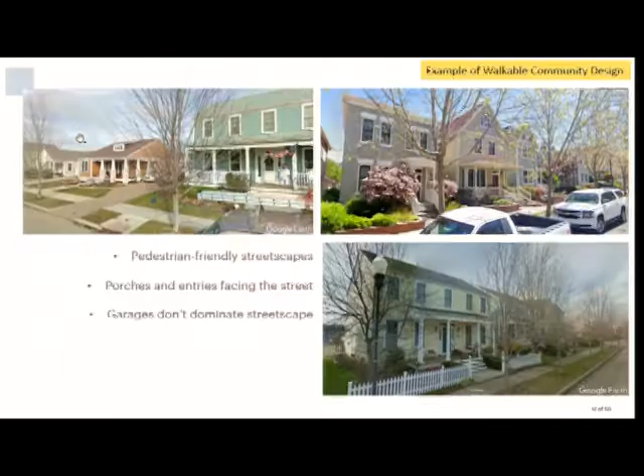So we talked about the input we've received so far, but what is this code about? What is it making? Here are examples of what this code is aiming to make. We are not regulating architectural style, but we're regulating form and relationship of the buildings to the street, the height of buildings, all that.

One thing, if you take one thing away from tonight, hopefully it's at least this: all of these buildings are house scale buildings. Remember that term. There's basically 2 categories of buildings. House scale buildings are the size of houses, large and small. Those might be a single house, a 4-plex, or a duplex, but they're house scale.

The other end of the spectrum is what we call block scale buildings, which are always bigger than a house. They might have multiple units, they might be commercial, office, or a hotel. But as soon as you get bigger than a house, it's a block scale building. This entire plan, this entire code, is all about house scale buildings. That's a really important thing to understand and know.

So the big takeaway is that all the streetscapes are pedestrian friendly. One of the things we mean by that is there are porches and entries facing the street, and the setbacks are not huge. Although we have a utility easement along the front of all lots that requires a 10-foot minimum setback no matter what, plus whatever you add to it. You see that the garages aren't all over the front, and some builders still want to build that, and that's great because some buyers still want that. But more and more, people want neighborhoods that aren't dominated by garages on the streetscape.

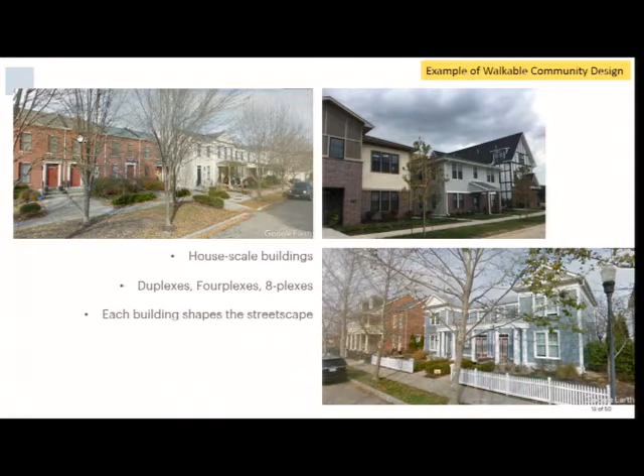Have you heard of that? A cottage court is like a lot, maybe 100 feet wide, with maybe 6 or 7 individual cottages arranged around a garden—pocket neighborhood is another thing people call them. So that's in here. But you can see they're still all house scale. They're not 3-story buildings, they're all 2-story buildings.

And then there's a small area that would be zoned at Main Street. I like to say—I know these pictures aren't of Dubuque, but I always use the example of Dubuque Street here in downtown, that 1-block stretch from the Vetro north, off of that pedestrian mall. That little 2-story block stretch has a small town Main Street feel. That's what we're proposing for a 1-block area, basically at McAllister and Sycamore, and that would be for this whole South District. So it would have its own little main street—it just wouldn't compete with downtown, obviously.

And this is not new. This is a development in Papillion, Nebraska that we're working on. The developer there, his name is Jerry Reimer, and the project is called Prairie Queen. There's 40 acres - I thought it was 60, I said earlier, but it's 40 acres, 600 units.

What he did is he came to us and said, I'm a multifamily apartment developer, and I'm done. I don't want to do it anymore. I'm sick of it. I don't want to do single-family development, but I don't want to do multifamily development as I know it, and I've seen this thing missing middle. What about it? So he signed us up to design this neighborhood. There's not a house in it.

It's duplexes, fourplexes, sixplexes, eightplexes, and then townhouses. And then there's a little main street on the top left, and there's neighborhoods around it to the north and west. He strategically put that little main street basically in the center of a bigger place. So it's off to the left of his project, but it's actually in the center of a bigger place when you zoom out. I show this to you because he's building 600 units here.

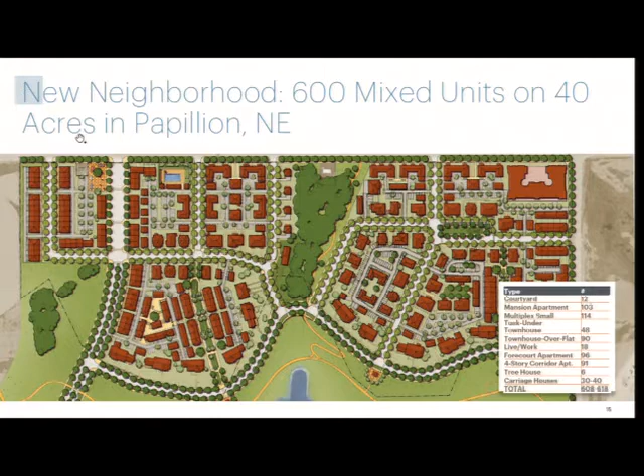An important thing to point out is that the efficiency that single-family house builders count on is similar in these missing middle types. This slide shows there are about 6 building types, different options out there, and we developed 6 unit types and basically arrange them in different configurations to make those different building options. So the builder knows, oh, I have a palette of unit types, and I can use A and E to make a duplex, or A, B, and C to make a triplex, and so on. But you don't have to reinvent them. So you've got 6 unit types designed, and he just mixes and matches them to create 4plexes, 6plexes, whatever it is, and makes different buildings.

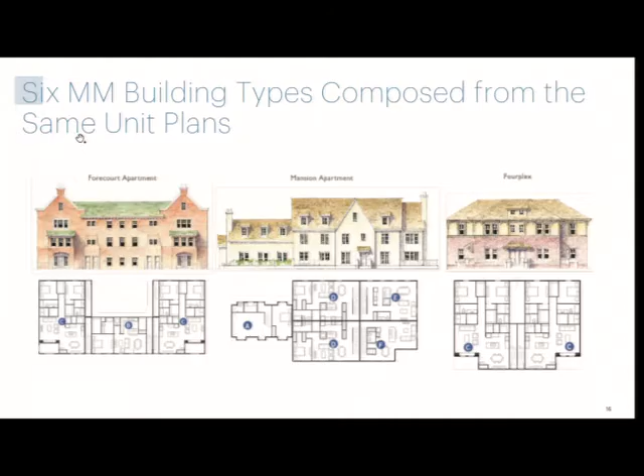But you can see how they're house scale buildings. They have the 2 stories, and the 3rd story is in the attic. The features that this type of approach basically has are these that I'm going to point out here.

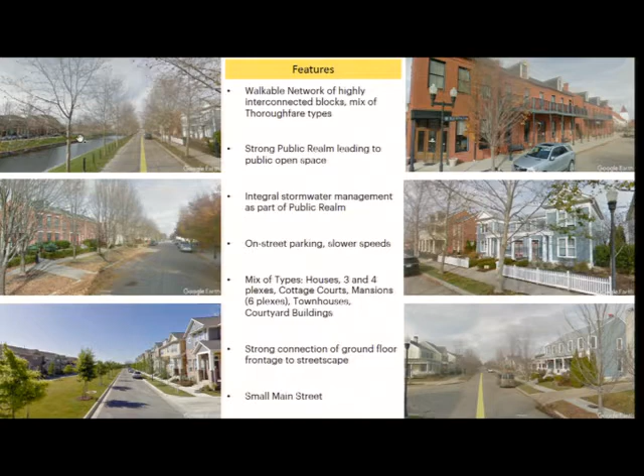It's a walkable network of highly interconnected blocks, and walkable means that there's somewhere you can walk to within walking distance. You might say, well, I can walk everywhere, but there might not be something you can walk to, and so that might be a center. It might be like a neighborhood corner with a cafe at it, or the main street, or a little park. There's always something you can walk to, or maybe it's nature here at the edge of the South District.

There's a mix of street types - we call them thoroughfare types - and that's to make... if you look at really interesting places, they're not all the same thing. The public realm is very strong. The public realm meaning the streetscapes outside - when you go outside of a building, you're in the public realm. That's always in these kind of projects designed very well, very nicely, and it connects it all. It's like a big fabric or a big network to connect it all.

Then stormwater management - it's always integral as a feature instead of being put off to the side with a fence around it. When you do this, people say, well, we have to collect stormwater and manage it. Why don't we just make it into a system that is right along the streets or into parks, and we can actually see it, and the buildings confront it, and it's a feature. Even when it's filled with water, you can look at something.

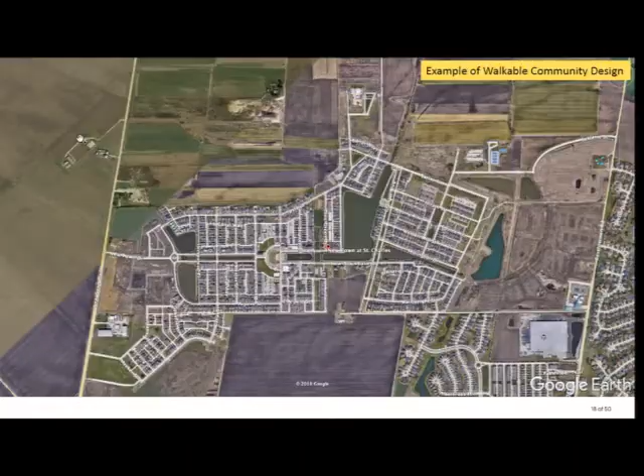So let's talk about the code. This form-based code, we're writing it for the South District, but we talked to the city about writing it so that if you wanted to someday apply this to other greenfield areas not yet considered, you could use this tool beyond the South District—so you wouldn't just silo it to those 1,700 acres. So when you read this, it doesn't say 'the South District code,' and that's why—so that you could take this and, through a process, map these zones onto yet-to-be-determined areas in the future. So you get more bang for the buck.

So how many of you have heard of the transect? Okay, a couple of you.

The transect is basically a really simple system somebody came up with about 20 years ago. They said, hey, we need a simpler way to talk about development than we currently have. So this system basically says, when you break it all down, talk over and over and look at everything and boil it down, there's basically 6 categories, or transects. Each is a category, and the first one is nature.

T1 is nature, and you have that here at the edge of the South District. T2 is the country, rural. T3 is basically neighborhoods that are mostly single-family houses but have something within walking distance to go to—so it's not suburbia. A lot of suburbia isn't T3. T3 is most like your north side neighborhoods, the single-family portions where you have something to walk to, those older neighborhoods. A lot of that is T3.

T4 is the opposite—it's also some of your north side. It's some single-family houses, but mostly fourplexes, duplexes, and sixplexes, buildings like that—house-scale buildings. We're still all talking house scale, okay? T5 is like a majority of your downtown—big footprint buildings, whether a couple stories tall or many, usually up to about 5 or 6. T6 is like the building across the street with the big hotel, the Hyatt Place, or those other big 10, 12-story buildings.

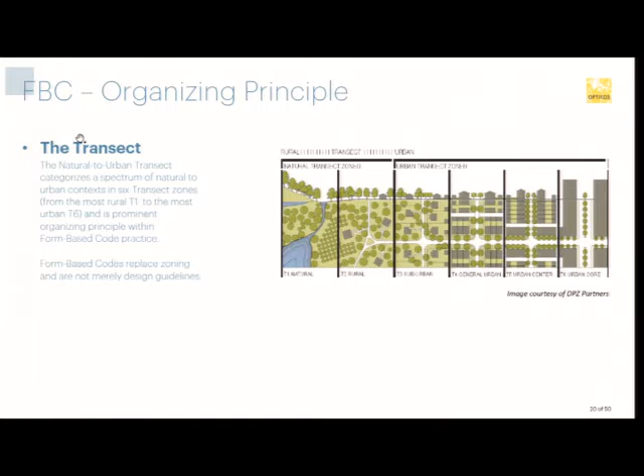So let's apply that to Iowa City. In the left-hand corner, T1—that's nature, right? It doesn't mean the development that left a little park in the middle; it means nature, green areas, wetlands, all that. In the South District, it's at the edge, and you totally have it. Then T2 is farms and country.

Not low-density residential, but farms and country—very different. T3, again, we talked about that, and those are examples here in town. Then you see T4. Now look at T5 and T6—you see how much bigger they are than T4 and T3? You can just visually see that, right?

Well, in the South District, we're only talking about these—nature, T3, and T4. We are not talking about the others.

I think one of the owners slash developers asked today about essentially a building that would be in the T5 category. And we said that has never been in the cards, as far as we understand the vision for the South District. Now, if that has changed, that's something from a policy level that we need to hear, because this code doesn't accommodate that—this plan does not accommodate that.

Just want to be super clear, that's what we're talking about, these three. When you break it down into those, it's really simple to understand - Nature, T3, and T4, and we can talk that way. It's a lot simpler than urban medium or residential high. Believe me, we've tried all that, and it's just very hard to communicate with each other about that - is it RS-8, RS-12? Which one's more intense? It's way easier with T3, T4, and T1.

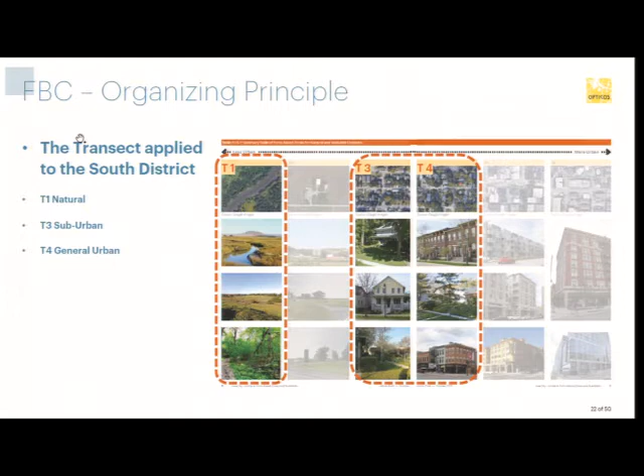So very quickly, those zones with a little more detail. Here's the nature zone - it's no development. If there's a utility building or some type of safety building that needs to happen out there, obviously, but there's no development per se. It's nature.

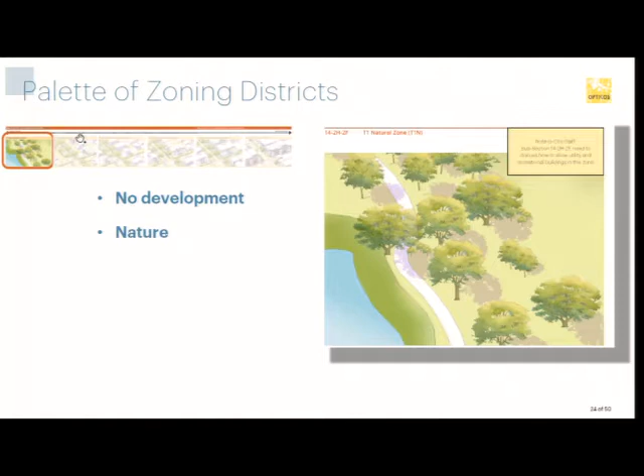We broke T3 down into 2 flavors. One is the edge, and you see it's 2 stories. Instead of using density and floor area ratio in this code, it uses building types. So it's like saying, here's a duplex, here's a fourplex - are either of these allowed in the zone? Yes or no? That's how this code works. It identifies all the elements, all the types, and it tells you if they're allowed in the zone or not. In this zone, house, duplex, and the cottage court are allowed.

In the next flavor of T3, there are a couple more options allowed at the bottom. You see multiplex small, that's a 6-plex, and the townhouse small.

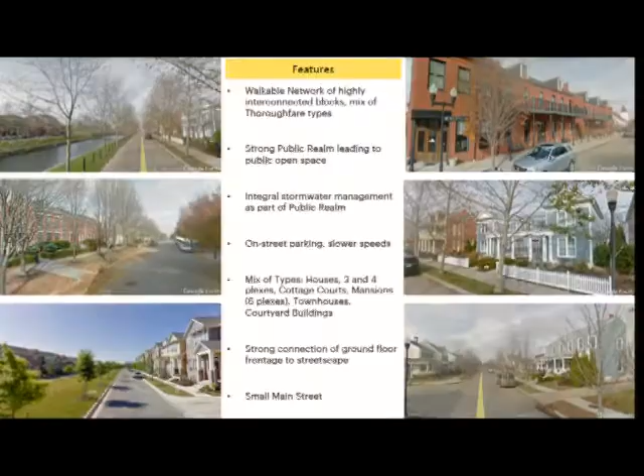I got to show you this 6-plex to show you something here before I forget. You see the building, middle right, the blue and white building? What do you think that is? Anybody? What do you think that building is? Multiplex small - what's that? It's a 6-plex, but it's a multiplex small. Exactly.

The story behind this is that I was talking to the town architect last year, and he said he loves showing that building because somebody came to him to buy a lot to build a house in Newtown, St. Charles, and they said, take us around and show us what we can buy, what you can design, because they design every building fresh there. You come, and if it's a single-family lot, they say here are the rules, but you tell us what colors you want. So they were walking around, and as they walked out of his office and down the street near this, he was showing them other buildings over to the left, and they said, whoa, stop - design it like that. And he said, that's a 6-plex at 36 units to the acre. And they said, no way.

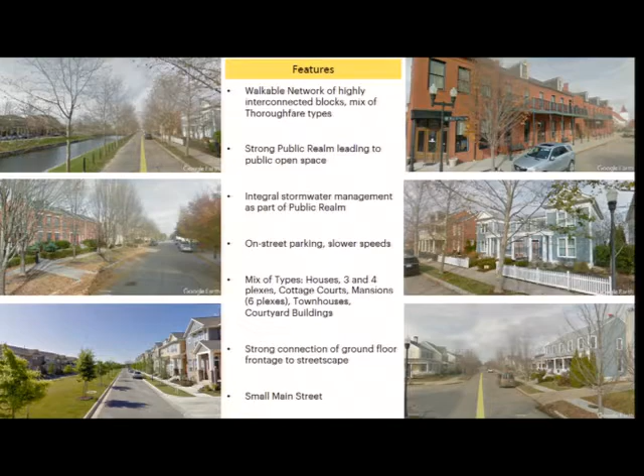I said, well, design our house to look like that. So I just wanted to show you that this thing, density and all this other stuff that we've been given as rules across the country, they don't really serve us in communicating with each other. They looked at that and said, wow, design it as a house, and we can't even believe that that's a 6-plex. It feels so good, house scale. So just a little story there.

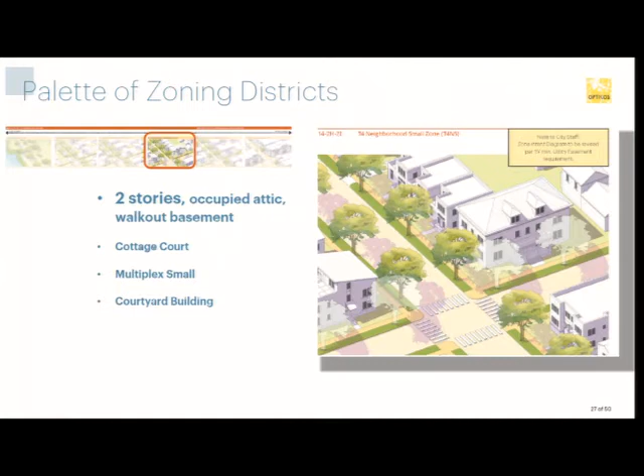So those are the 2 flavors of T3, and then 2 flavors of T4. You'll see that in the T4, there are no houses allowed. This is cottage courts and then multiplex small and courtyard. And this one only allows 2 types. Remember, of the whole mix, we're looking at probably 60 to 70% T3 zones, which is mostly houses, and about 20 to 25% T4 zone, which is not houses. There's a mix across the whole place, but generally that's the mix. So when you see the 4-plexes and 6-plexes and 8-plexes, remember that's about a fourth of the whole mix here.

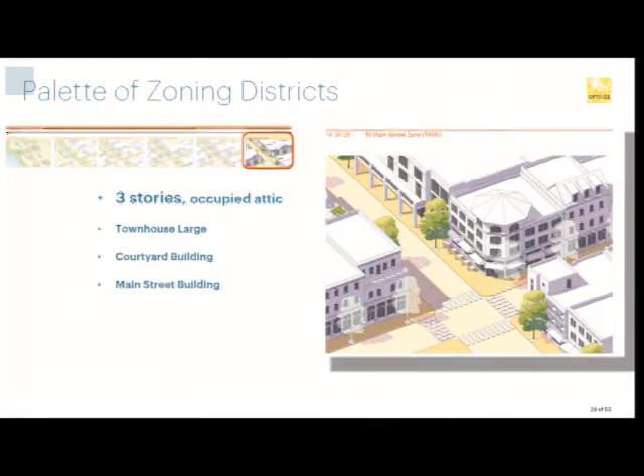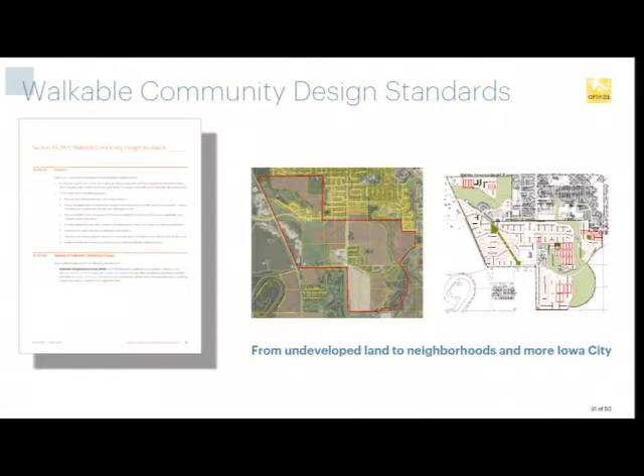And then the little Main Street area. This code has use standards, so people sometimes think form-based code doesn't regulate land use, but it does - certain uses are not allowed, or uses are only allowed to be a certain size. One of the key factors in this code is that it has standards for how to make the blocks. Now that we're laying it all out, they don't need to go through a process to make the blocks, but they need to go through a process to show what they intend to put on the blocks and how they intend to design each block, which types they're going to put based on the zone that's allowed.

And then the street types. So there are 6 street types that make the network, and frontage standards. This is probably one of the most important aspects of a form-based code.

Most of the time, the connection between the private and the public is not really well thought out. Not because people don't care, they just don't know how connected those really are and how big of an impact that relationship plays. People say, well, it's just a sidewalk and a parkway, how important can it be? But how the entry connects to the sidewalk makes it feel pedestrian-oriented or not right away. Houses are easy, but once you get up into 2, 4, or 6 plexes, it makes a bigger difference whether that building is pedestrian-friendly or not.

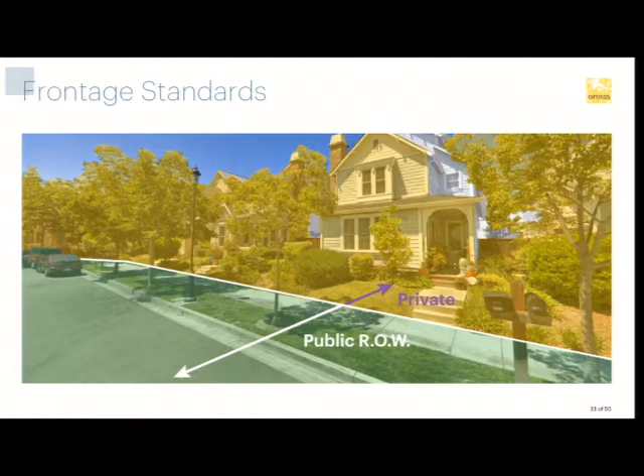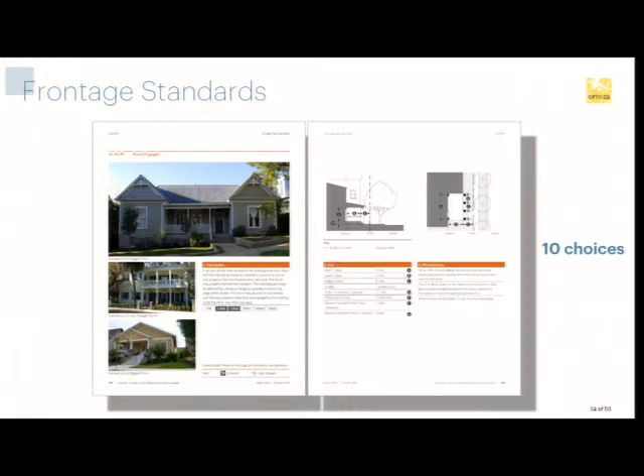So the code has standards to talk about that and identify the requirements. It gives you 10 different options depending on where you are in the area. You can look at them online, but the code has a lot of photographs and diagrams to explain, okay, when we say porch, this is what we mean. It's got to be at least 6 feet deep and at least 8 feet tall. Seems like obvious stuff, right? But it's not.

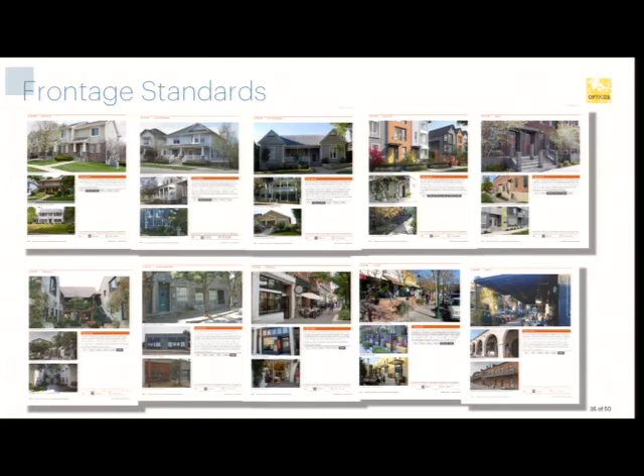Civic spaces - are you going to build a plaza? Are you going to build a greenway? It tells you the dimensions and where those things are allowed.

Okay, what do these 2 buildings have in common? Anybody? Don't think about it too long, it really should just pop out to you. Height? They have the height - well, one's 3 stories and one's 2. They look the same because of the scale. So check it out.

The density is almost identical. You hear people talk about density a lot, right? People say, we don't want the density, don't increase the density. But density is the wrong conversation to be having - it's about building size and what's in each building. Because the building on the left is 175 feet long, 3 stories tall, and has 60 units. The building on the right is 40 by 65 and has only 2 stories with 5 units, and yet numerically they're almost the same density, by 1. I could make this 30-30, but that's not the actual density.

Somebody would look it up and call me and say, it's 29, Tony. So I put 29. But do you see - and I don't know if you have conversations about this, but most cities do - this is not the argument to be having. Because what happens is you could settle on a number, but if you don't want the building on the left in your neighborhood, you didn't prevent it by the density. It's building footprint, building size. That's what this code - you'll hear people say, wow, we looked through this thing and it really regulates building footprint and size, and we're not used to that. That's why - because if you don't regulate that, with the best of intentions, you could end up with a building on the left. And the building on the left has nice units on it, it's not to say the building on the left is wrong, it's just not for the South District.

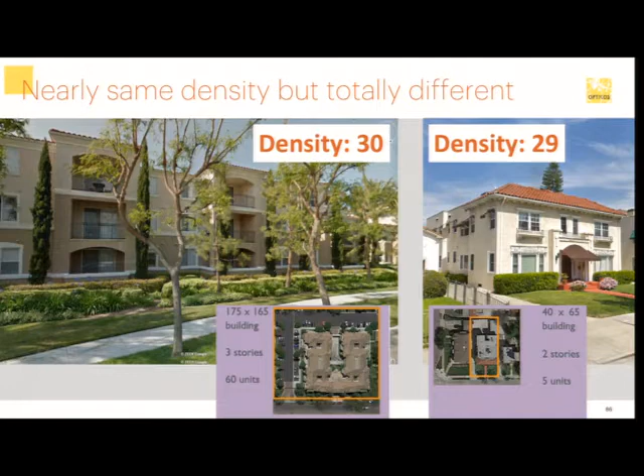This is really helpful because that building we were just talking about, this guy on the right, what's going to keep it from getting bigger other than a standard saying you can't make it bigger? And if you want to make it bigger, you can add a wing to it. Because if you don't do that, people will make them as big as possible for efficiencies. It's not anything malicious.

Yeah, so there was a picture I was just showing you. Again, the main body on that big building to the left is very large, and the main body on the building on the right is house scaled.

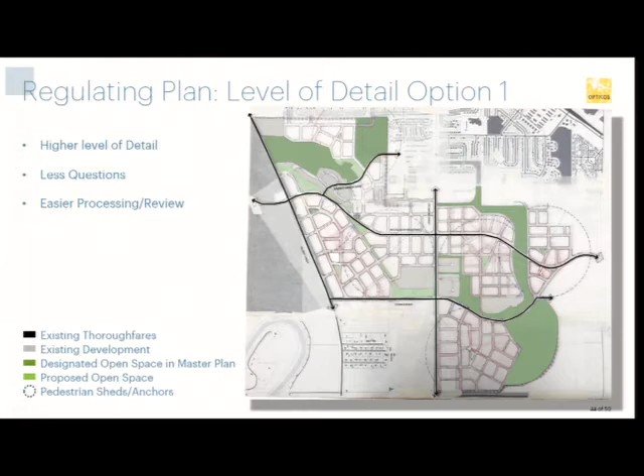Okay, so the regulating plan, we talked about the 3 options with the developers. We explained the 3 different levels of detail, and they chose option 1, which you can see a preliminary plan we presented last fall, and you can see the drawing here. Those are the 2 other levels. See that?

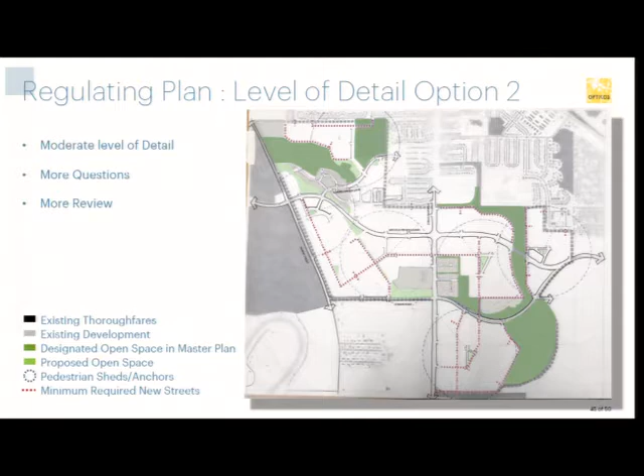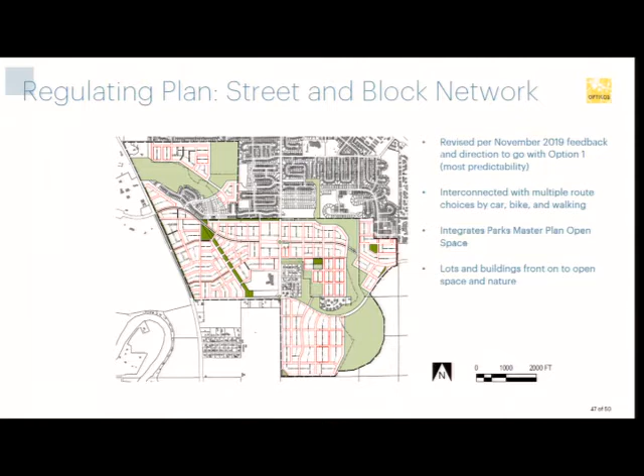So then, taking the level 1 approach, which they asked for, we went further and developed that into more accurate blocks and streets to show what actually fits on each property. And then depending on where it is, we applied the zones. This is the first time we're showing this, and we showed it to the owners this morning.

So we're looking for feedback on that. Again, the T3 zones are mostly houses with a couple other types in there, and the T4 is opposite, okay? And I just want to say again, for clarity, the T3 is about 60 to 65%, 70%, and the T4 is probably 20 to 25, something like that.

And as far as the financial makeup of what it would cost to be in this area, because I think we have the school board here, it'd be important for maybe some conversation throughout to talk about affordability with this type of mix, and the integration of what it could look like with higher and lower economic status individuals living within this community.

Certainly. So, for example, if you look at the T3 zones and think of that as where the houses are the majority of the mix, it's up to you and the developer to offer the houses for a certain size and certain affordability. We can't regulate that, but the affordability is going to come in everything but the houses, for sure. In the houses, you can only do so much, but duplexes, fourplexes, and sixplexes, that's going to provide more affordable units just because of the smaller footprint you can make them in, and those are mostly in the T4 zones.

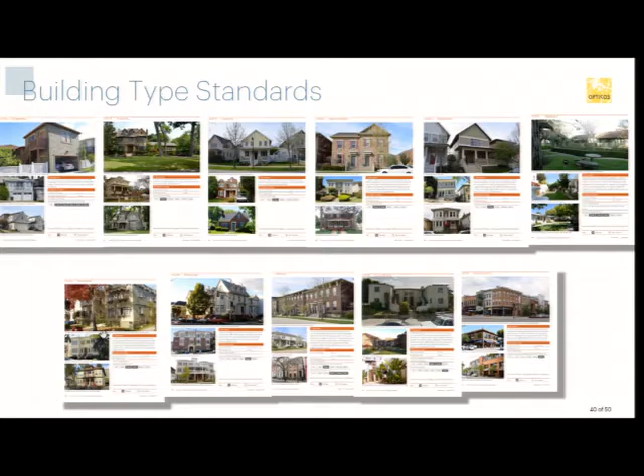Those are the higher ones, and then the sixplex here. I don't talk much about the 12 and the 16 because they're only allowed in the highest zone, T4 neighborhood medium, and it's a choice. So again, we don't even know if we'll see it, but those are the two higher ones. Does that help answer the question?

Yes, and which one is T5 here then, the last one? None of those - none of them. Remember that this whole code is written for T3 and T4. Okay, so that's a good question, let me go back to that real fast.

And it's not just the height, it's their footprint, how big they are. So you're a little house, and there's a certain balance - at some point you say, wow, that's too big across the street from me. And the T5 buildings are huge.

That's the other thing - remember the terms house scale and block scale? Block scale buildings can be as big as a block or most of a block. So that's an easy way to go, that's too big next to houses. Or maybe you don't think that, but at least that's the approach we use. Does that answer the question? Yes. Okay, Bruce, if I might comment on your question.

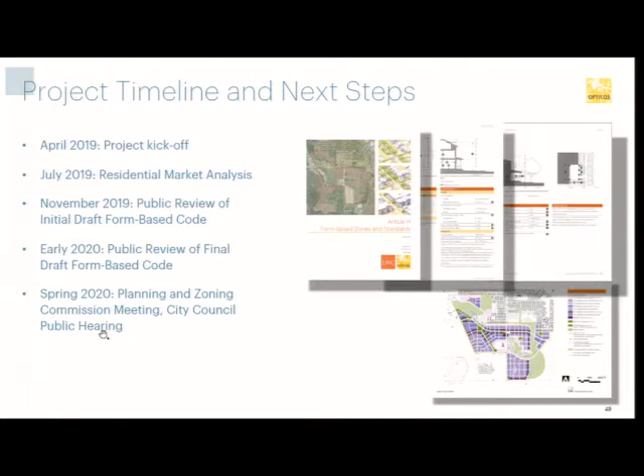I just want to point something out also about the process that is rare, but really good in this case. Most communities, when they go through a process like this to make any type of code, small or large, they hold back the draft. They work with us for a year, 2 years, 3 years on this before they let the public see it, because they're concerned that once it gets out, people will read it and go, well, you didn't have all this figured out, so we're upset. And so that's the reason. It's not a mean reason.

It's just they want to make sure it's all airtight. And what we told the city early on is we said, that's almost impossible, with so much content. You don't want to produce a draft that the public reviews that's irresponsible. We wouldn't do that. But you want the public review on this sooner than later. So the city took a really good step and said, yeah, that's a great way to go.

We're going to release the administrative draft. So this is the initial administrative draft. We're going to put that out so people can see it. Because if you don't, what happens is people's anxiety raises on a number of different levels. It might be different from you, and so on. And so they've taken that advice. And so that's to let you know, this is out a year sooner than it normally would be.

And we're getting a lot of good feedback as a result of it, and collaboration, not people coming to a meeting and saying, I had to wait 2 years for this, and I'm really mad. So that's been really, really effective. And we can open it up, and people have their questions. And, hey, that's a great observation, and we've already made some internal changes—like, hey, that's a better way to say that statement, or that number is better stated this way, stuff like that. So I just want to thank the city for doing that, for taking that step, because that's not normal, and it should be.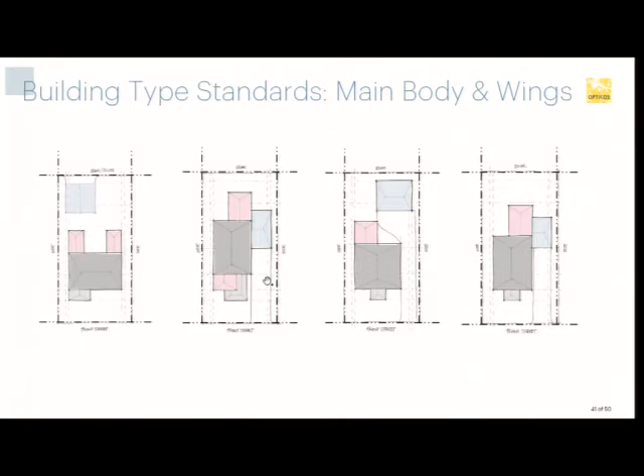I just put these diagrams up, Mayor, about the parking. The one on the left shows a garage off of an alley, which is allowed, not required. The second one is a garage with a side drive going down the side. The third one is a garage attached in the back. The fourth is another version of the second, showing it attached. We were discussing today the ways you can attach the garage to the building, and how many garages you choose is up to you, but the lot has to get wider if you want them all front facing. We had a discussion with a developer owner just before this meeting, and it was almost all about this - we were looking at his floor plan and garage plan trying to figure out ways to use that.

One of his comments was, well, I have to make new floor plans. And as we mentioned to him, the approach here is different. Not just to garages, but the whole development. That's what we were asked to do. So if we are off on the direction this is supposed to be going, we need to know that, because we made a whole code. It's not like we're making alien buildings that nobody would recognize. It's just certain things are changing.

Like you can't put a 3-car garage on the front of the lot with the house behind it. That's not how this is working. Like we said to him, you can still have a 3-car garage, you just need to make your lot wider, or we gave him ideas to use his existing floor plan, turn it around and remove it from where it was. But to take his existing floor plan as it is and drop it on one of these lots wouldn't meet the standards. But it doesn't mean it can't be molded to fit.

So I think it was more of a philosophical divide rather than a technical one. Because technically, we could have figured it out, or we can figure it out, I would say.

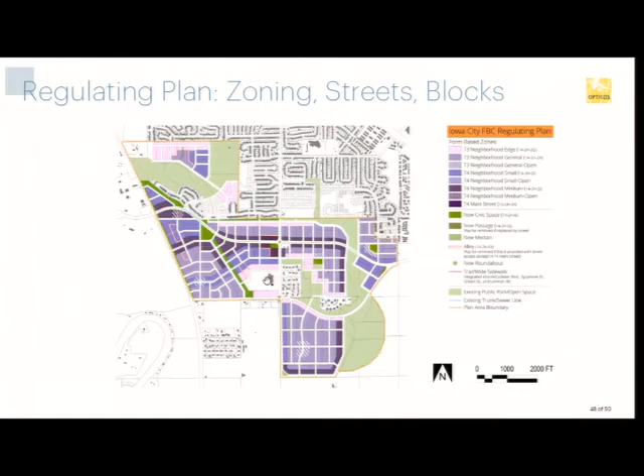Well, at first we haven't planned for it because every time we've asked about a school, we've heard nothing—we haven't heard that a new school is being contemplated. So, no fair, Laura, no fair. So the first thing to do is know if one's needed, and we've heard to date that one wasn't being contemplated here, that one was needed but maybe elsewhere in town. That's what we've heard so far.

And then if you knew one was needed here, well, what kind of school is it—high school, elementary school, what is it? Because they have acreage minimums, I would imagine. And then the other thing is, what is the school looking for? Are they looking to be near few neighbors, or do they not care? Or do you want to attach it to the existing school? All kinds of things—so in order to answer your question, we have a lot of questions.

We've got some folks here who could probably start to answer them, and I'm not sure we can do complete justice to the level of detail coming up, but we will be doing another review of enrollment projections based on developments in the works. We go through this process regularly, and I think we've got one coming up which would contemplate this proposed plan, the number of units, households, and projections for elementary school children. We haven't discussed where we'd have a school in this area in addition to Alexander. I would think it'd be highly unlikely to be another high school, for example.